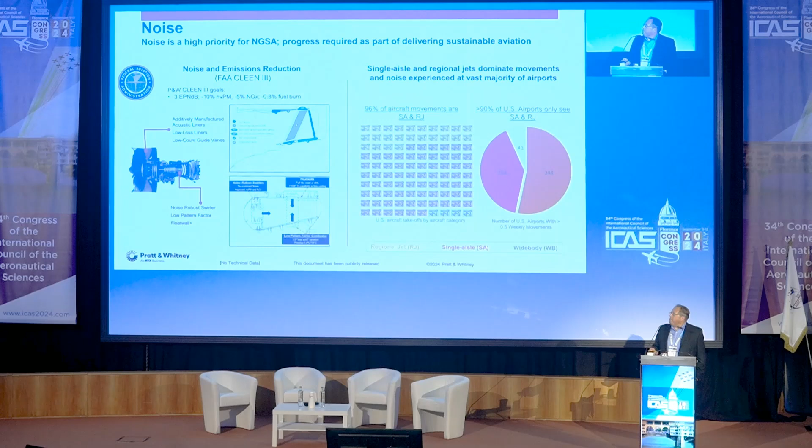So another data chart. So we use RQL combustion. We like to call it advanced RQL combustion to differentiate it from past systems. On the left is a plot of regulated emissions. So I set 0 or 100% to the V2500, a very, very popular engine. Many of you probably came here this week on. And then compared that to our current 1129G, that's what's flying around today. That's what we sell on the A321, or the A320 family. LEAP, and then where we're going with that configuration, the future TALON.

So for those of you who don't know, the joys of an RQL system, it's relatively simple. It's very, very robust. It's easy to scale. It has a lot of advantages as you try and scale this down and apply it to single-aisle aircraft.

What we're planning to do with this configuration, and you can see compared to the V2500, all of these engines are great. They've made huge strides. 17% fuel burn plus this kind of emissions reduction. Already huge improvements. What we're looking to do is take that configuration and reduce the nvPM, which wasn't necessarily a specific target when we did this design, back down towards lean type levels, and then maintain where we are with the class leading NOx of this configuration.

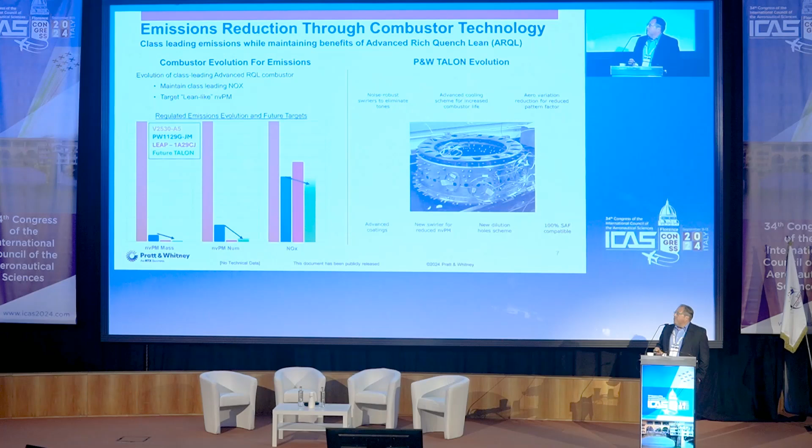So the first phase of this is actually what we talked about in the first chart, that CLEEN III combustor. And then what we're working on now is taking the next evolution of that to go develop this kind of nvPM reduction as we do that in the next few years. So why is that important and how are we setting our targets?

Again, working with a different part of the FAA, the ASCENT program, so university-driven work, as well as NASA. We're taking very detailed measurements of our existing combustors, as well as trialing out new combustor configurations. When I claim we think we can get to lean-like nvPM, we run proof of concept testing. So it's not TRL6, it's not TRL1. We're progressing. What we're doing is stepping through this variety of fuels, making sure we try and build up the database so that we can go drive our technology selections as well as inform policy making.

We're seeing out in the marketplace a variety of tools for contrails predictions that aren't very accurate, and it's actually distorting the market already. So we feel a need to go back to basics, build up the science. On the right, collecting data, so on the x-axis is soot particles per pound or kilo of fuel versus how many ice crystals you're likely to create. Going to the bottom left is good.

So compared to legacy RQL combustors, they're in the top right. As you make them cleaner, the industry thinks you make less contrails. I spotted on there where we think our current combustor will be on an apples to apples comparison. And we're looking to drive that down towards the bottom left, working on particulate emissions as well as non-volatile particulate emissions. So again, trying to set targets that are physics-based, then build the science base up around that.

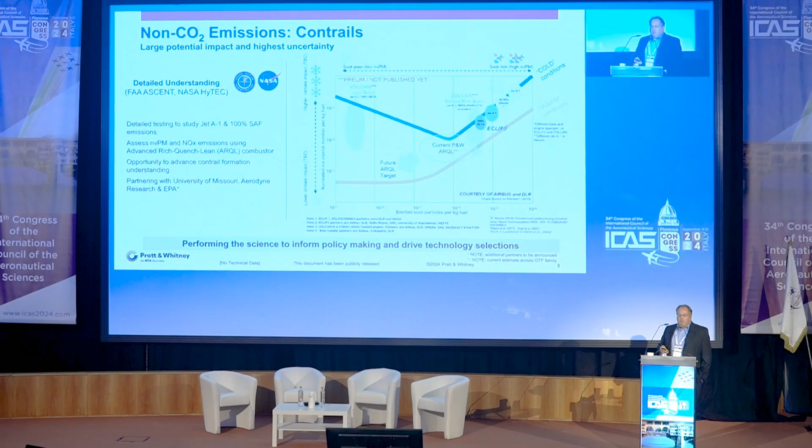So the other thing we're doing is working on alternative configurations. One of the great things with the GTF is it's actually very easy to install on nearly every airframe architecture. It has a very small LPT, it's relatively short, the fan diameter is a bit large, but that tends to be out of the way. So we have been selected by two different companies or entities that are doing full-size flight demonstrators. And I think Jim Harmon pointed this out on Monday, I hadn't actually thought about it this way. This is the first time people have done full-scale demonstrators since the 1950s, the Dash 80, that led to the 707. So it's a pretty cool time in our industry.

On the left, working with NASA, working with Boeing on the transonic truss-braced wing configuration. That's a modern GTF on that application. They call it the X-66. And on the right is a blended wing body design, JetZero was here talking a lot about this yesterday. So we are providing the power plant for that. Both of these intended to go to test in the next 3 or 4 years.

Why do the engine people care? It really helps us to understand what these configurations are, what the performance is, how our engines will interact with these different configurations. So great learning opportunity for us for these configurations that may or may not become future products, but we now understand the details of how these things are put together.

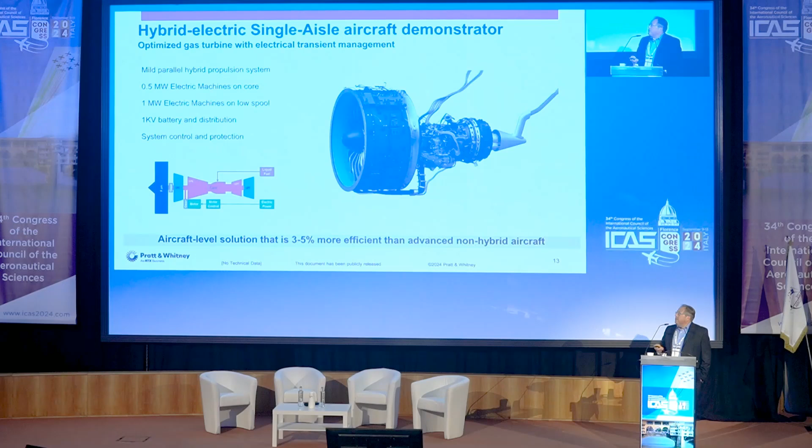So hydrogen, as a carbon-free fuel, assuming it's made green, it's a wonderful thing. Gas turbines like hydrogen as a fuel, or I would love to have it as a fuel. It was used in the 50s. It was selected for its great properties. From an engine person's view, it looks pretty good.

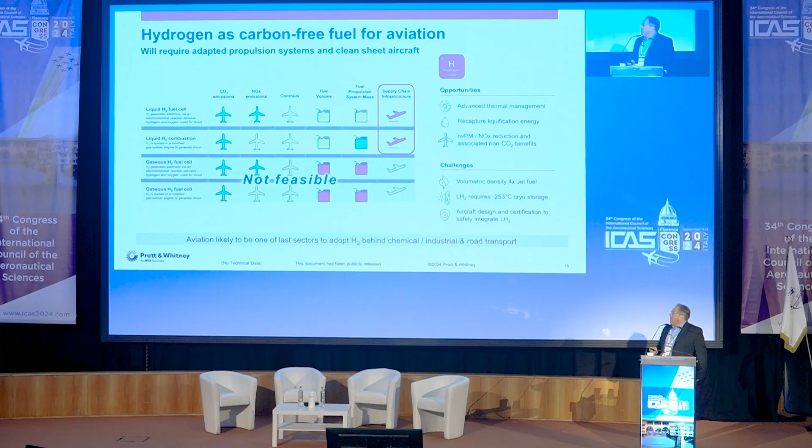We all understand the pipe from the aircraft to the engine is really hard. The pipeline to the airport is probably the hardest. And so when we look at it, we're coming at it from that perspective, which is it's going to take a while to get hydrogen. We'll probably be one of the last sectors to get it at volume, and so we should plan accordingly.

So the way we're thinking about that, there's really a few different steps you could take. So the first is just take a conventional, say, turboprop engine and plumb it for hydrogen. I think there's plenty of examples that show that's feasible. That's been done in the past. We've done it in the past. It's within experience. If you don't change the combustion system, you will have a NOx issue, but you could go

do this. You'd get a small efficiency improvement, but it's probably not a great system solution, especially if you're not sure that you're going to have hydrogen. You're going to have a product that doesn't go flying if you land at an airport that doesn't have hydrogen. So the way we're thinking about it is to tackle some of the challenges, the ability to have hydrogen, and then also have reserve margin. Hydrogen is very leaky, so it's going to be challenging to guarantee enough hydrogen on board.

So you could use kerosene. We know how to handle that. We do that today. So by having a dual fuel system, you can foresee an early step where you have hydrogen at some airports, not all. You can have a better product, but you're not necessarily tied to it. So that's an area of focus. You'll be seeing more coming from us before the end of the year on that.

The next step, you could take your engine and optimize it for hydrogen. Alan talked about that. You can get low NOx with development. But what it really leaves on the table is that to take that gaseous hydrogen and liquefy it is 30–40% of the total energy of the fuel. So you're leaving that on the table if you're just going to expand it and then heat it up and burn it. So we're looking at how you would fully optimize your system around hydrogen.

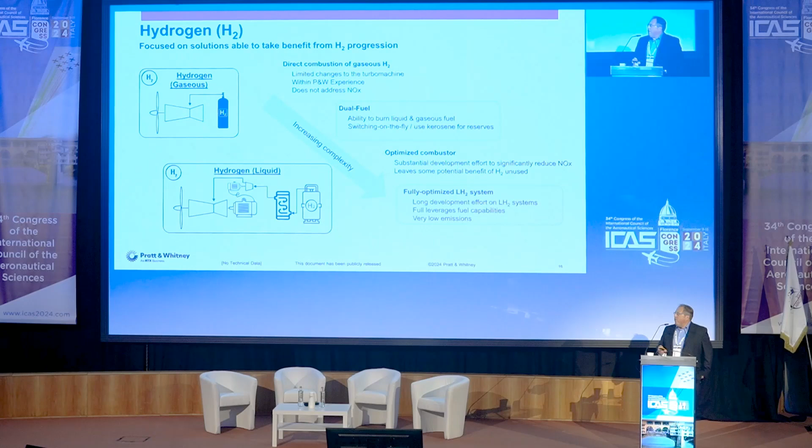So this is obviously the longest lead time. You would fully leverage what the fuel can do for you. It would generate very low emissions. I put this in because this isn't 2035, to be honest, but it would be interesting to know if this is a path by 2035 because it could change how rapidly we try and use hydrogen for aviation.

So our test case, and this is something we're working on with ARPA-E from DOE, the Department of Energy, is called a HySIITE configuration. It's basically a flying Cheng cycle, so you use the cryogenic hydrogen to pull more water out of the exhaust. It's easier to condense, you have nice cool fluid. As you burn that hydrogen, you also create 2.5 times more water, so it's easier to grab it and put it back into the system. Use it for intercooling. This can deliver perhaps 25 to 30% energy reduction at the engine level.

TRL is low, that's why ARPA is interested. They like to understand what the art of the feasible is. We've pulled out the 3 hardest bricks. So one is a liquid hydrogen combustor that really can drive to low NOx and handle a lot of water or steam. Manufacturing of the evaporator, which is what you use to create the steam, and then the condenser, how you get the water back out with hydrogen. So these things are wrapping up by the end of this year, and that will be providing a first look at the feasibility of the system and then deciding where we go from here.

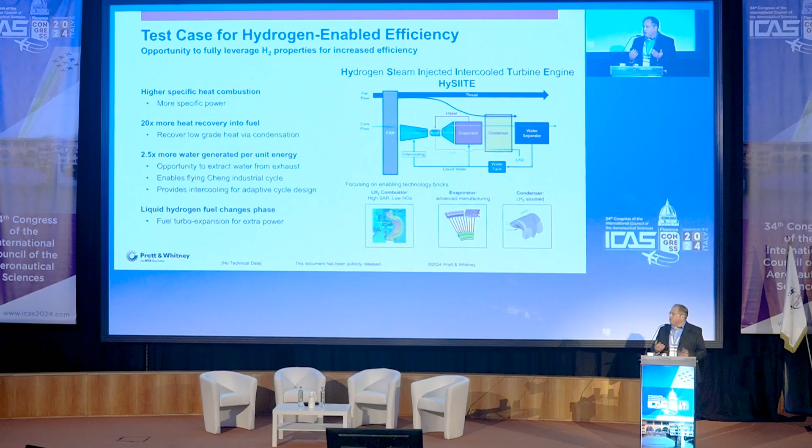But again, this is not 2035 ready, but these are the kinds of things, if they turn into reality, suddenly hydrogen might look a lot more interesting and a lot more economical. It would change that shift. So we're trying to understand that space. Then I'll get back to reality.

So safety and certification. We talked a little bit about this. I'm actually very proud of the company I work for. This is something where we've demonstrated our culture over the last year. It's cost us, I think, $7 billion. We had some manufacturing issues. We used data. We analyzed it. We identified the issue. We did our safety assessments.

New data came in that changed the safety assessments, and we took action that has been very painful for our company. We did all of that without anyone getting hurt or anyone really knowing. And so from a culture perspective, I think it's an excellent example of what it takes to be world-class in the aviation industry, which is sometimes you've got to use data, you've got to recognize new sources of data, and you've got to understand how much you're going to be able to change.

So as we look at these revolutionary fuels, as we think about how we will do these new configurations, we have to stand back and recognize the expectation of the world is when these things enter service, you can go flying reliably every day, and I'm going to get to where I want to go without having an incident. The safety record of the aviation industry is incredibly high. So as we start thinking about how we're going to certify, how we're going to change these things, we have to be very mindful of this fact.

The standard is not going to be, I think it will be okay. We're going to have to come with data and experience to show it's going to be working. And that's for ourselves as well as for our regulators. We take it very seriously. We think other people do too, or we know other people do.

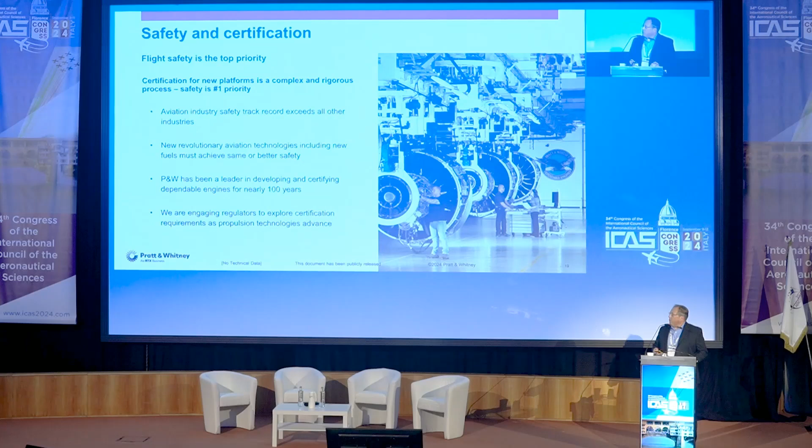So with that being said, we've gone on a journey. We've gone through what is our customer asking for. So they want reliable propulsion that's quiet, puts out low emissions. We're exploring hybridization. We're exploring hydrogen. We're doing all of those things. Probably not surprising, our view is the next propulsion system for a high-volume single aisle is an evolution of the GTF that we've been flying around.

By the time we do the next product, we'll have about 130, 150 million hours on this configuration, depending on when. And what we're doing is taking all the successful things we've learned with this, we're looking forward to what operating environment and requirements we're going to have, and then we're inserting the technologies as appropriate to turn this into a robust, safe, operable machine that, yes, it reduces noise and emissions, but it also is guaranteed that I can ramp up to production quickly, I can go flying every day, and our customers can actually fly their missions.

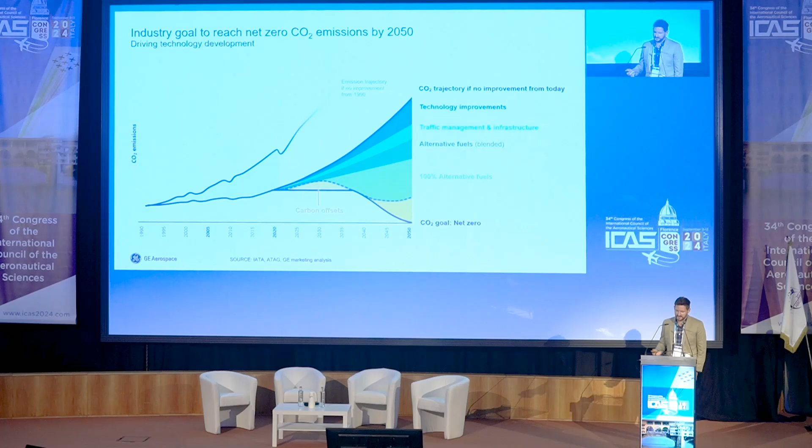And we do think in 2050 reaching CO2 neutrality is possible, but it's only possible if we all start moving now. And for that, what we do is that we're pushing the envelope this decade, really. It's a decade of innovation for us on technologies, on making sure we're ready. And as a whole, the way we look at this at GE is that we have a now, a near, and a next. What we've already done now is that we have new engines in service right now. These engines are flying. They're actively replacing less fuel-efficient engines, and they're doing well at that.

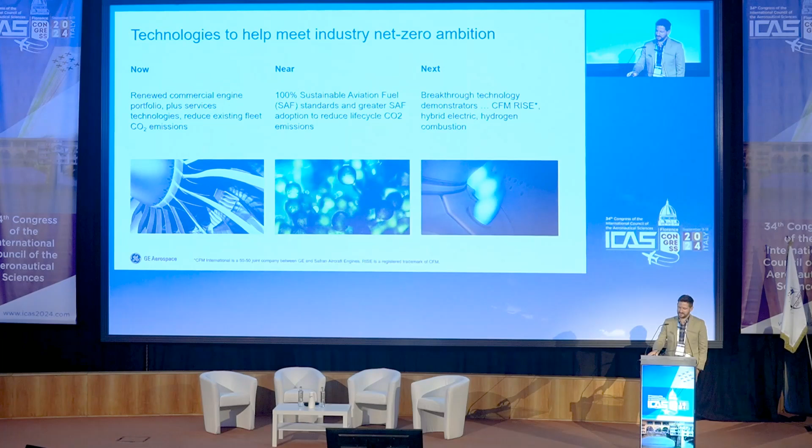The near is moving towards more sustainable aviation fuels. There's a lot of announcements. The entire industry is moving towards that. For us, as a propulsion provider, what that means is that we show the compatibility, and we're leading the charge on what is good for us and what is not good. It goes back to the safety piece. And then the next, of course, this is what we're all here to look at, is the next generation technologies. And for us, this is the RISE engine. So we're trying to innovate on new engine technologies, creating revolutionary efficiency.

And I think this is really the only piece that we in the industry disagree about a little bit. What does revolutionary mean? What is revolutionary enough? But we all agree we're trying to push the envelope to get to less energy consumption in the end. The second piece that I want you to take away is that everything we do here is fully compatible with all these energy sources that we talk about. Full compatibility to SAF, to hydrogen, and to any external energy sources like batteries or fuel cells.

And for all of us, really, in the industry, and I say this to my team as well, I think it's just a tremendous decade that we're almost halfway through now of innovation. Really pushing the envelope, trying out cool new things, failing a couple of times, but that's part of the game: failing, learning, pivoting, understanding why it didn't work out, and then running tests. And I think Delphine talked about some tests earlier that run better than expected, and wondering why we didn't push the envelope even more.

And with that, I'll go a little bit deeper in the RISE program. First, as I said, the now, right? We have a very large legacy fleet out there: the CFM56 engine that has amassed well over 1 billion flight hours, the CF6 engine that is the most produced wide-body engine. Wide-body is what we call a multiple aisle aircraft. The GE90 was a trailblazer in the 90s. It was the first engine that had composite fan blades. It was a huge step in the 90s, and it actually came out of the GE36 program.

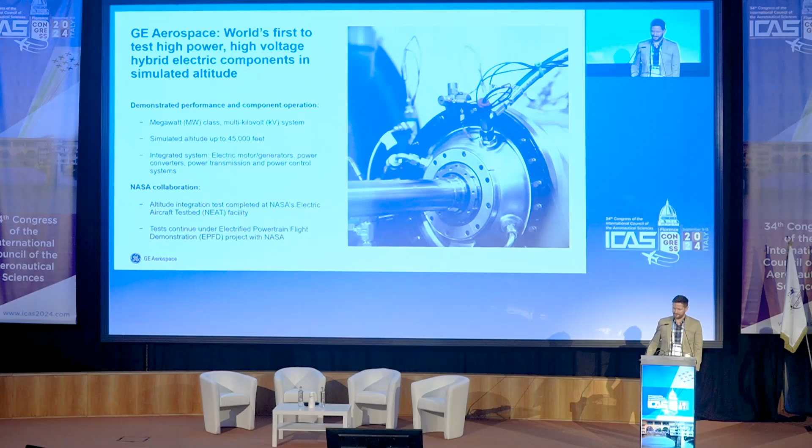And one other big program that we're doing with NASA, of course, is the EPFD program that I mentioned earlier. So this is the EPFD program that we're doing together. Gaudi talked about that earlier. Very big program, a $260 million program. Actually, it's quite a bit more than this even. We have some investments on our own, and we worked on it before the program was officially launched.

And what it is, we're flying this entire system. All of us here are talking about the flying demonstrators and their importance. I would counter that a lot of the work, at least for us, happens before we ever fly, because we set the standard so incredibly high. For this program, we want to have real flight quality hardware.

And what that means for us is AS9100, ISO 9001 plus. ISO 9001, that's what we call lab quality hardware. When we talk about flight quality hardware, we want to go even deeper. We want to understand every single piece about these components. It's very intense. Almost parallel to the TRL work that we're doing is the MRL work. There's a lot of lessons you can learn there, also from a supply chain perspective. And having worked through COVID, that was also an interesting endeavor.

We're further working on integrating the entire electrical system. And the one thing that we always say here: while this demonstrator is working with a battery system, the entire concept aligns with any energy source in principle. So that's the EPFD demonstrator.

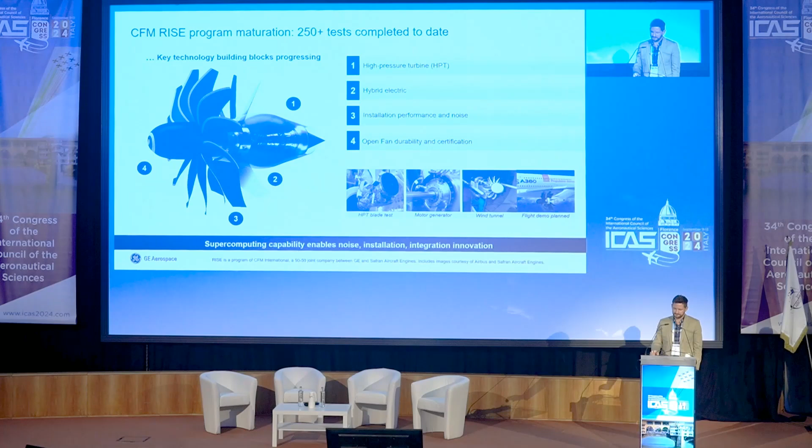To tie it all together, what I want you to leave with is that RISE is 100% SAF compatible. We are targeting 20% fuel efficiency improvement, and we have over 2,000 engineers working on this. This is a real number, by the way. We have over 2,000 engineers on CFM between Safran and GE working on this. So we really mean it. We're investing hard.

And for me, as an engineer, this is the coolest thing, right? Really trying hard to get an HPT better, a compressor better, working on hybrid electric technologies, working on the open fan, and being afforded the luxury this decade to really refill and recharge our technology portfolio to be ready for the next generation of engines.

And what comes next, I said already, we have the 250 tests completed. We'll keep going. We'll continue our baseline tests, move up to module level testing. We have a couple of exciting component level demonstrators happening. There's a number of demonstrators. And eventually move on to full ground test and a flight test. And I think I'll leave it at that.

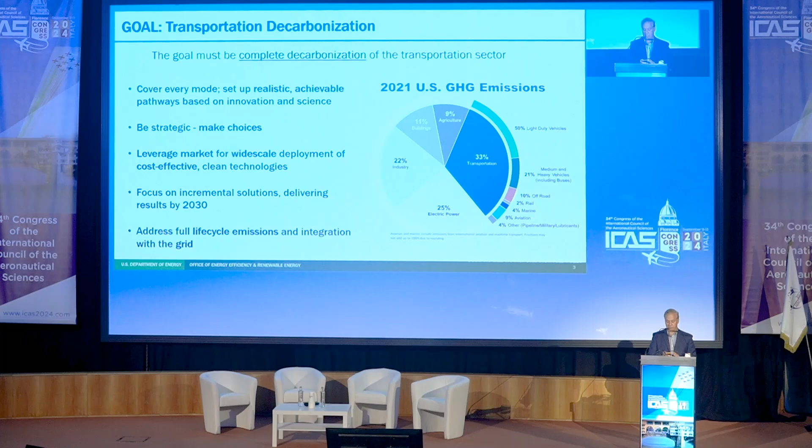And very importantly, everything we do, we look at full life cycle emissions. There are several life cycle models, but I think the most prominent life cycle emissions model in the transportation space is called the GREET model. It has actually now been adopted by China as their national model. It's developed by Argonne National Lab and our team. And it looks at every part of life cycle emissions. This is important as we talk about batteries or SAF or hydrogen, going up to the exploration, whether it be minerals or oil, the production, all the way through to the end use. Again, we look at all of those pieces very, very carefully and very science-based.

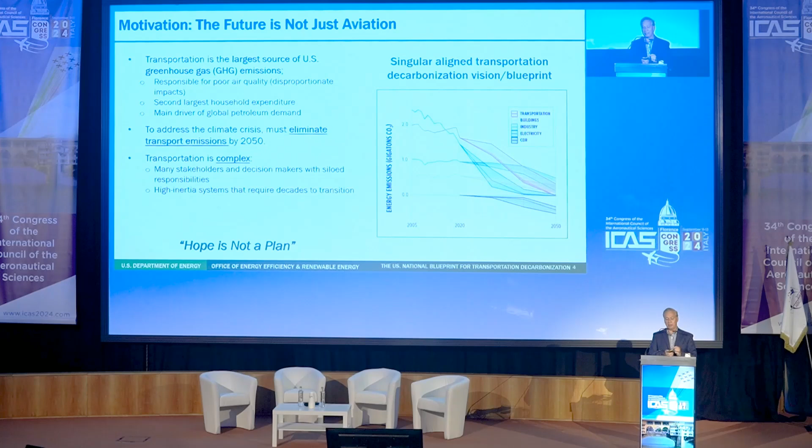So let me just tell you, I'm going to hit just a few of the other sectors overall, give you the big picture of the strategy, and I'll come down to aviation specifically. We published the U.S. National Blueprint for Transportation Decarbonization about a year and a half ago. This was a joint all-of-government effort. There were three key agencies, the Department of Energy, the Department of Transportation, including FAA, the U.S. Environmental Protection Agency, but agencies such as NASA, certainly on the aviation side, critical support, our housing and urban development, because a lot of this is also a social aspect of where people are living and how you impact the transportation for them. The strategy really laid out for every sector how we will approach decarbonization.

It laid out the overall strategy and started making some recommended choices, or proposed choices, that we are now implementing in our policies. It led significantly to those that you may or may not be familiar with. The U.S. passed two very large pieces of legislation in the last few years, providing many billions of dollars towards both transportation and clean energy, and many billions more in tax credits to incentivize low carbon fuels, from batteries to hydrogen to SAF. And this strategy informed that approach.

We promised that we would issue very detailed action plans for every mode of transportation, one for rail, for maritime, certainly for light duty, heavy duty, and also for aviation. There will be an initial update coming out, hopefully in a matter of weeks, on the aviation climate plan for the U.S., and then a much more detailed aviation climate plan early next year.

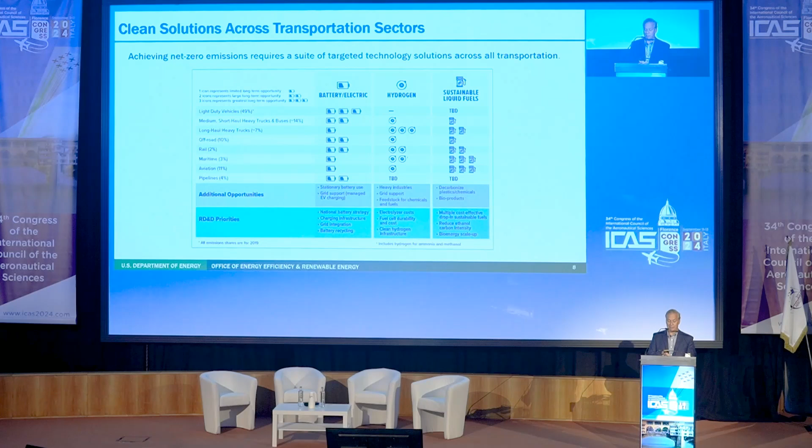You can look across the other sectors as well, but in time I'm going to focus a little bit more on the aviation side. I do want to point out, because this is really important, we have had, as I mentioned, over $100 billion in transportation decarbonization investment approved in the last few years, and over $100 billion in EV and battery investments in the U.S. by the private sector, $160 billion actually. That's just in the last 2 years of new investments in on-road electrification and batteries.

There's a relevance here to the aviation community as well, because that work is going to continue to dramatically drive down battery costs, but also improve battery chemistries and technologies, increasing densities, which will be important for the aviation sector. Also, significant work in the U.S. on tax credits for liquid fuels, which are helping to energize the market at the moment.

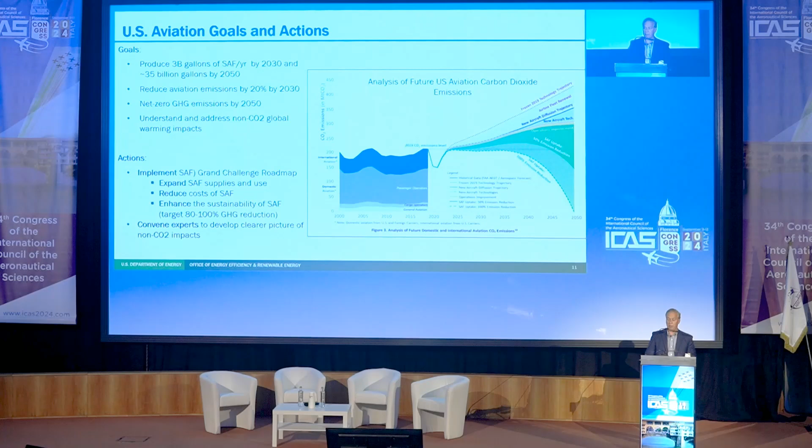That is understudied. I think there's a lot of work now that is ramping up on that. That will be very important. I'm going to speak a little bit more to our SAF strategy.

So we launched something called the SAF Grand Challenge about 3 years ago, and this is an effort at both bringing together all the different government agencies involved, but also industry, both fuels producing industry and airlines, in one combined effort, both on the technology side, but also in setting clear market-based goals.

And in here, we basically set a goal by 2030 to achieve 3 billion gallons of sustainable aviation fuel in the U.S., with at least 50% emissions reduction. For that, and again, as I said, long term, we have to move beyond that, 50% greenhouse gas emissions reduction. And ultimately, by 2050, we know we need about 35 billion gallons to hit the future aviation need.

This was not just a target by government, but also by the U.S.-based airlines to basically buy that fuel and utilize that amount of fuel. This represents basically all the non-military fuel in the U.S., regardless of what airline it is and whether it's a domestic or international flight.

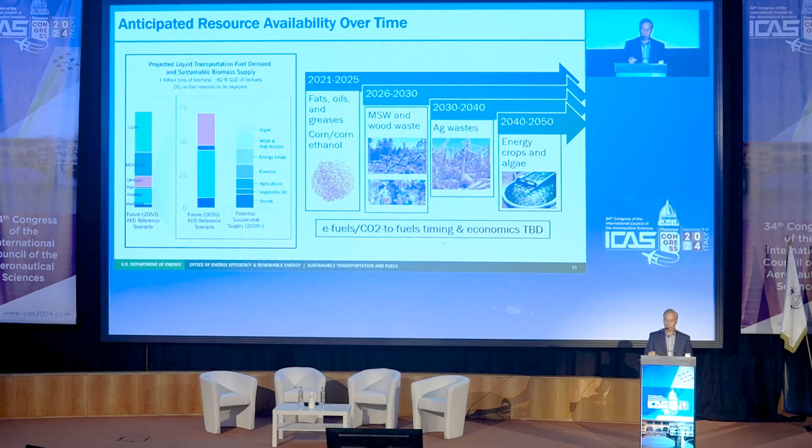One of the things that my boss, the Secretary of Energy, often will ask me is like, all right, this is your plan. How do we make this happen? Literally, what do we need? And our answer is we need, I told her at the time, exactly 428, maybe it's 500 biorefineries in the U.S. At first, that seems like a daunting challenge, but when you think about the fact that we actually already have several hundred, they're a little smaller for ethanol today.

So we basically grew an ethanol industry, low carbon liquid fuel industry, by 15 billion gallons over 10 years. We basically added the production capability from getting the raw material all the way through the supply, spread out around the country. We basically need to replicate that growth rate between now and 2050. So it's a lot of work, it's a lot of investment, many billions of dollars of investment, but it can be done. And again, all of the parts of the plans we are laying in place are trying to do this on an economically based basis, looking at what can be done.

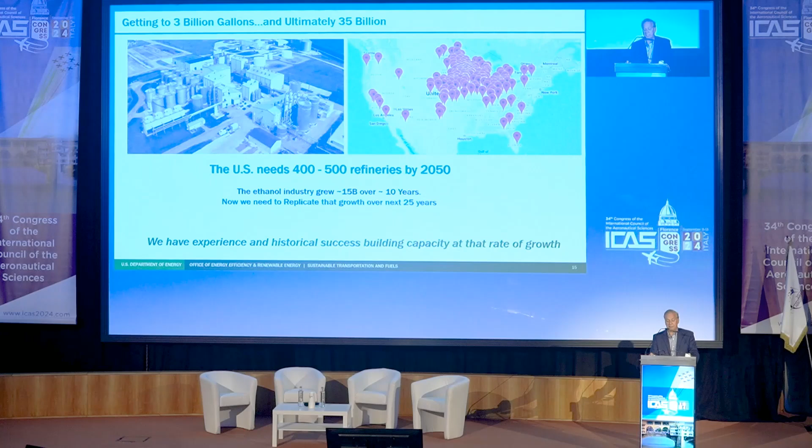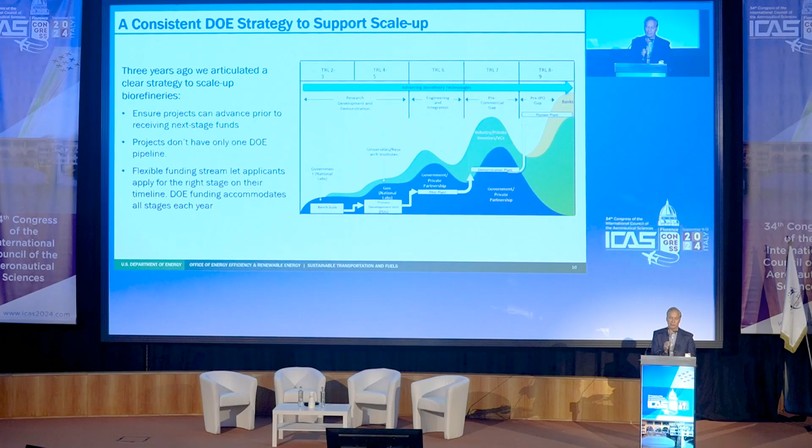And we have an ongoing strategy where, I'll just show you here, if you go back to 2019, every year we are investing in pre-pilot, pilot, and then demo scale. Those demo scales get to be maybe up to about 80 million, 90 million US dollars of government money, probably about equal, if not more, on the private sector. But we have basically been growing the number of both, pre-pilot to get to demo scale, because that's what it takes in a process-based industry like fuels to really get the scale there.

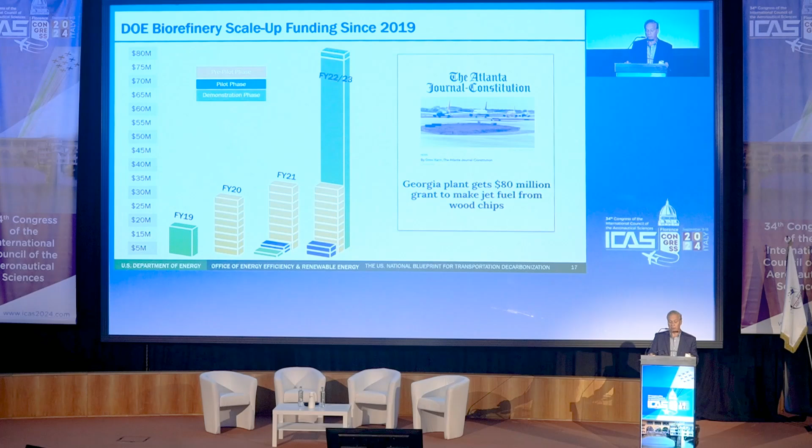You look here, this Georgia plant is one of our investments. This is a woody biomass, again, making SAF and jet fuel. So this has been a growing industry, like in many other parts of aviation. It doesn't happen overnight, but it is happening. And as I mentioned, we were proud to announce just this week that 3 to 5 billion gallons of capacity.

Now, the key question in that capacity is that fuel can also go to renewable diesel. And in the U.S., we use, as you saw, a large amount of diesel fuel. The new tax regimes that are in place and new rules that will be finalized basically equalize the playing field across fuels much more. And in addition, when you look at the renewable fuels market in the U.S., for renewable diesel there's not a big end pull. The diesel market's huge. The amount of renewable diesel that goes in is not that big, and there's no end person really saying, I have to have that renewable diesel. The producers will push the fuel to where the economics are better.

In aviation, we have a big pull, actually, with the airline industry that is basically saying, look, we know we need to decarbonize. We know we need to hit these goals. Getting to 10% is a huge proof that we are committed to getting there, and that we can get there in a reasonably economic way.

That helps create the market pull. So that 3 to 5 billion gallons, I'm reasonably optimistic that that will flow over to SAF. And now that capacity is basically starting to be lined up for production, it will really come to the market pull side of the aviation industry in the U.S., I think, to really pull that, to make that happen.

I do want to just touch briefly on a few other strategies in the aviation space. We are working extensively on a number of airport-based initiatives. It is a critical part of the overall strategy. You need to be able to get the fuel there. People talked about the challenges with hydrogen. On the airport side, there's also a lot on electrification in airports. Airports are major electrical users today. eVTOL will just add to that somewhat, certainly as we start looking at some level of electrification, smaller aircraft with batteries, charging load.

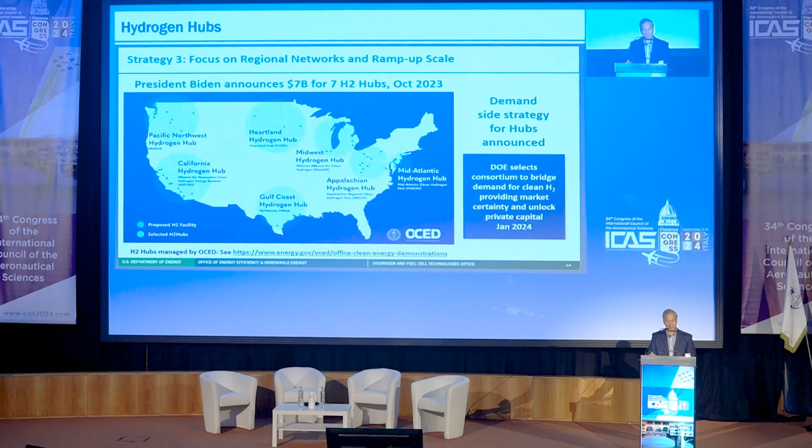Just a quick picture of the hydrogen hubs, if people ask me where they are in the U.S. And then just another quick picture to show you the battery investments in the U.S. There's actually been $160 billion in battery and EV in the last few years. It shows the power of when you combine technology, market forces, and the right overall policy incentives.

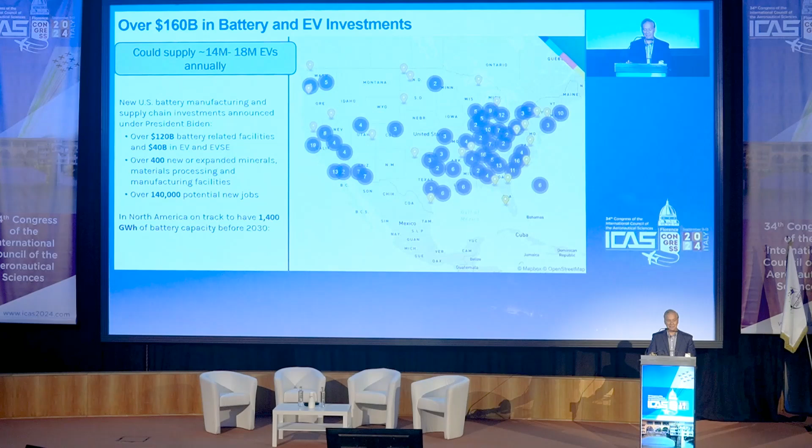So we're hoping to repeat some of that success on the SAF and aviation side. So again, thank you all. Clearly the challenges are big for all of us here. It's great to be in a forum where you have so many technologists who are really optimistic about the ability to get there. I do want to emphasize that we do, I believe, have a concrete plan to achieve our targets.

How many Italians in the room since we're here in Italy? There's got to be quite a few here. I worked for a long time for Fiat Chrysler. Sergio Marchionne was quite a personality. Someone invariably would walk into the boardroom meeting and say, well, sir, we hope this. And he'd say, you hope? You hope? I'm not paying you to hope. I don't want hope. I want a plan.

You can have very aggressive targets, very aggressive, but I want a plan. If it's a 100-point plan, fine. But you better have a plan of how you're going to get there and be measuring yourself along the way. And if we can't make it and we fail, fine, we call that out. But if you don't have any plan, how are you going to get there? And that is very much the approach we are taking in the U.S. overall. Let's have a plan to hit our decarbonization goals. We can't just hope it's all going to happen. If we don't have a plan that puts it all together, it will not happen. Thank you very much.

Big thanks to Michael. I think that really rounds it off nicely. We've looked at the propulsion side of it, and we all talked, it needs some energy somewhere, and you can see the US plan. I'd now like to invite my fellow panelists back on stage, please, and give you a chance to ask them questions before they go. So please think creatively about questions. And if you don't, I've got some ready prepared.